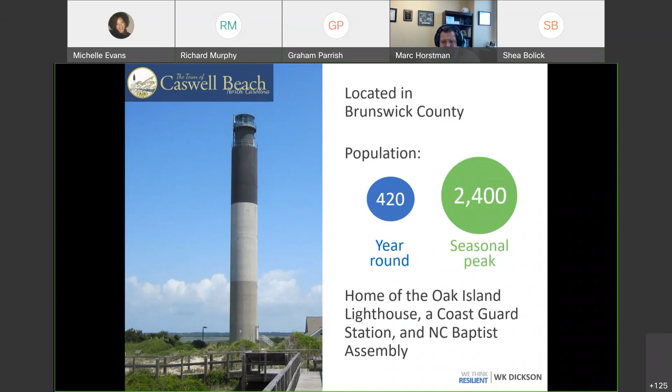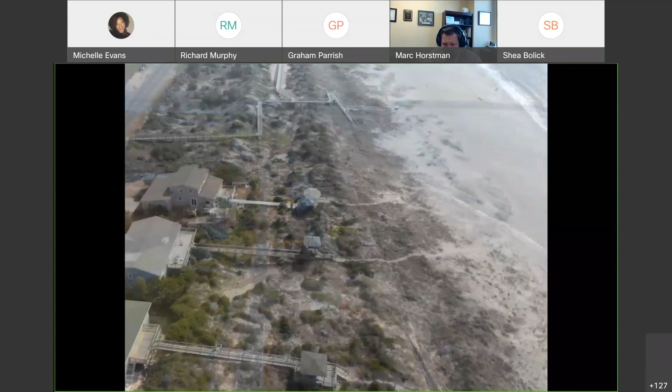I want to play this drone video here. This gives a nice purview of almost the entire town. As we watch this video, start thinking about a couple of things: one, you have a major tourist attraction in the Oak Island Lighthouse; two, you only see one road on the entire island, so one way in, one way out to this major tourist attraction. Also, you have the North Carolina Baptist Assembly at the end of the island, and the Coast Guard station located right next to the lighthouse, which requires emergency access.

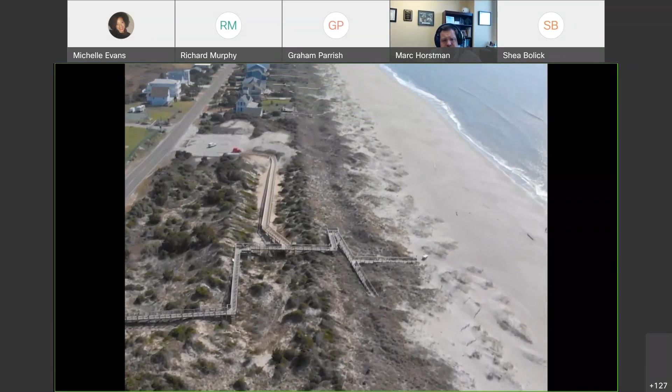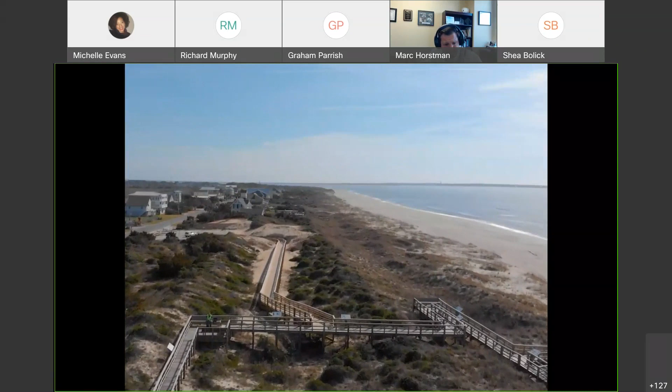But one of the benefits the town of Caswell Beach has is pretty wide beaches and a pretty robust dune system, with primary and secondary dune systems along the stretch. This is one of the few beaches in North Carolina where sand is actually being added onto the beach, compared to a lot of the erosion happening elsewhere. Flying over the dune in this section of Caswell Beach, you can see that wide dune system. Since we're talking about dune infiltration systems, what a great location and opportunity to implement this technology.

As a recap, here is an aerial photo of the entire town. Looking from here, you can see the golf course, the Duke Power nuclear power plant, and the effluent from the hot water discharge from the Brunswick County Nuclear Power Plant just outside the screen. Here are residential areas, the Coast Guard station and lighthouse located right down here, and the North Carolina Baptist Assembly.

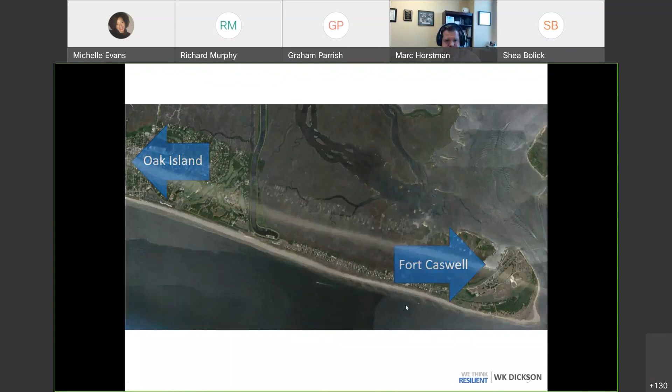To the west is Oak Island, and to the right, the Baptist Assembly is located at the old Fort Caswell. Zooming in, as we talked about, there was only one road, one ingress and egress.

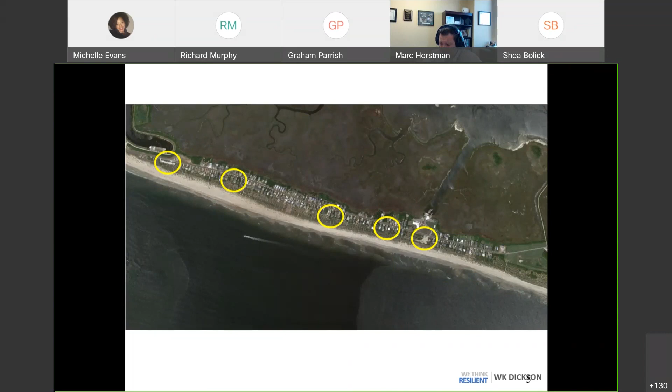Along that road, from moderate to large storm events, at 5 major flooding locations, the town experiences significant ponding. What do I mean by significant ponding? Here's a picture of it. It can rain not even half an inch, a quarter of an inch, and you get ponding along the road at these 5 different locations.

So you can imagine with only one way in and one way out, if an emergency happened, we'd need to get a police car, ambulance, or fire truck down this road to provide emergency services to the residents. Now, looking at this picture, I'm sure everybody here is thinking, oh, we can just drive through that, not a problem.

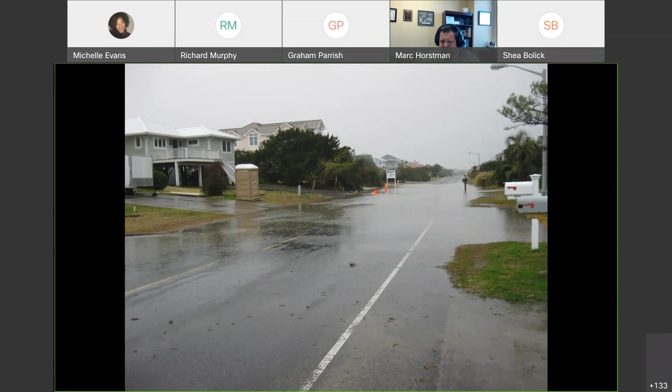But just as a reminder, in moderate storm events, that ponding depth is about 6 inches, or maybe a little less. In severe storm events, the ponding depth gets higher than 6 inches. And you might ask, why the focus on 6 inches?

Well, around 6 inches, you start losing vehicular control, or your vehicle can start stalling depending on the type of vehicle you have. After about 12 inches, depending on the vehicle, it starts to float. So while larger vehicles like fire trucks can push through some of this water, smaller vehicles run the risk of stalling and losing control.

Which is why, since this is recorded and put on by the state, I'm always going to say, please don't drive through flooded areas. Turn around, don't drown. And if roads are flooded, let's make sure we close them to help reduce potential accidents. But you could say, wait a minute, if we only have one ingress and egress, it's kind of hard to take that advice when there's only one way in, one way out.

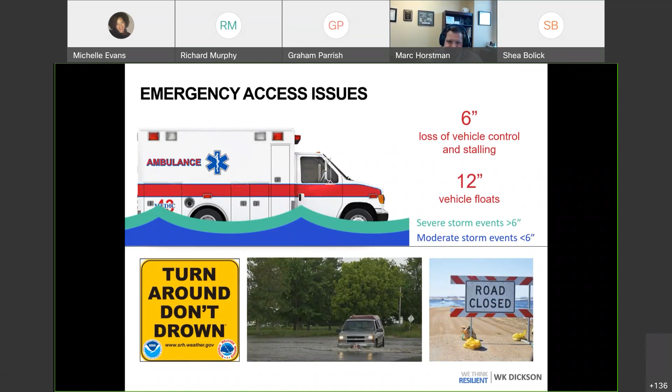So we've been working with the town of Caswell Beach for a while on ways to help address that flooding issue along Caswell Beach Road. As we looked at different alternatives, we thought back to other solutions that have been implemented up and down the coast.

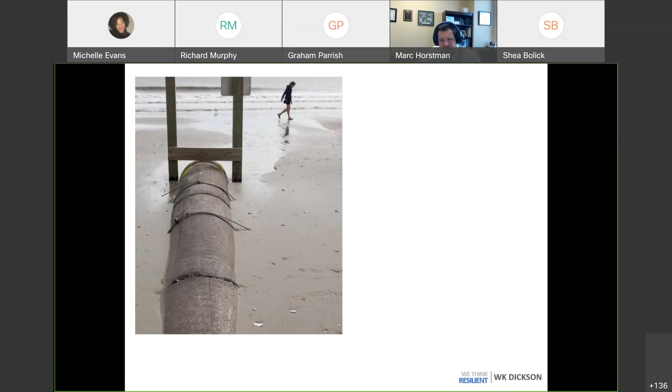One of them is a way to help resolve these stormwater discharges. Sure, one would think, why don't you just take the flooded water and pump it out into the ocean? In some cases with stormwater discharges, by gravity the water flows right out into the ocean. But you'll notice at any of these discharges there's a giant sign that says do not swim in this area - bacterial levels after a storm event could be high.

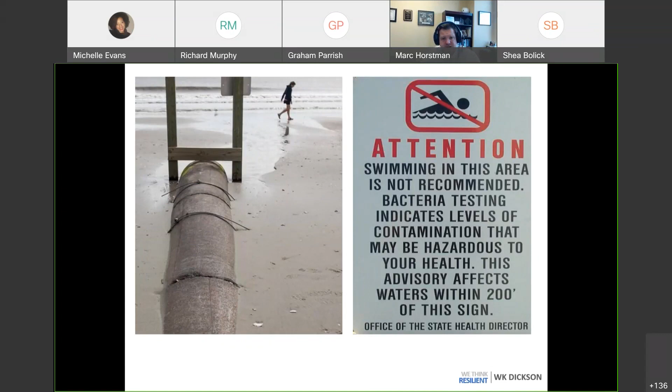In some cases, the state has to come in and, for public health reasons, shut down the beach. So you can imagine if you're a coastal town that relies on tourism, you really don't want signs that say please don't swim here, we've got to shut down the beach.

So looking back at some research NC State did, they actually installed dune infiltration systems to try to help remove some of these coastal outfalls. Looking at past research, these dune infiltration systems were very effective at reducing the amount of flow, infiltrating the amount of flow that goes through their system.

Referencing back to this report, one site had 96% of all flow get infiltrated. The other site, which was slightly smaller, had about 80% of all the flow infiltrated. As an additional benefit from a water quality perspective, they found that bacteria from this ocean outfall that would cause beach closures actually decreased by 98%.

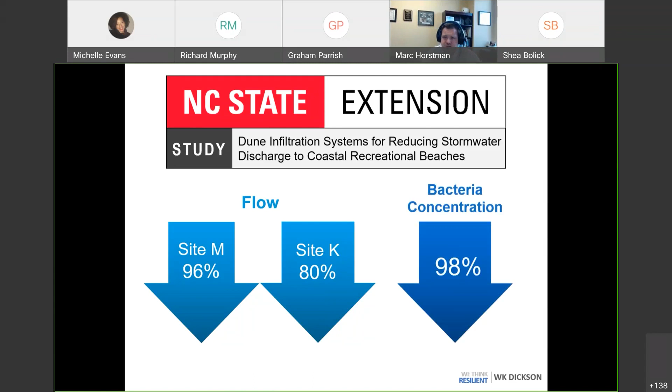So as we put in these stormwater control measures, we try to focus on water quantity and water quality. There's research indicating these dune infiltration systems serve both functions. So we said, let's see if we can utilize dune infiltration systems, if it's even feasible, to help address the problems Caswell Beach had. We did work with the town to do a feasibility study back in 2018.

Ultimately, the first pass we looked at was asking, do we have space to put in dune infiltration systems? Yes, as the drone video showed, there are primary and secondary dune systems along the wide beach. However, most of that area is owned by private property, in fact oceanfront private property.

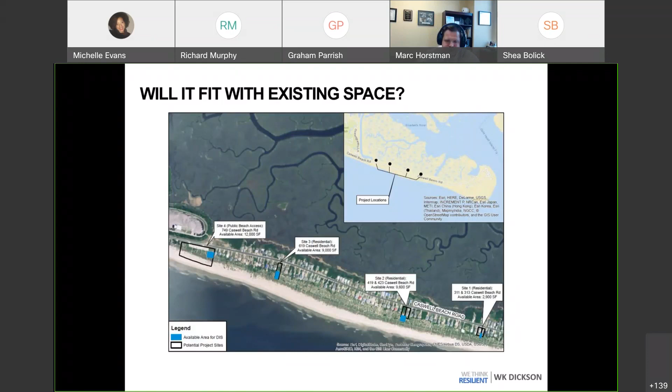Even though with GIS and the aerials it looked great - oh yeah, this site looks great, we have the space to put in these dune infiltration systems - once we approached the property owners and talked about the impacts to the property, construction, and trying to obtain easements, even laying out maps showing permanent drainage easements or temporary construction easements and what the system would look like...

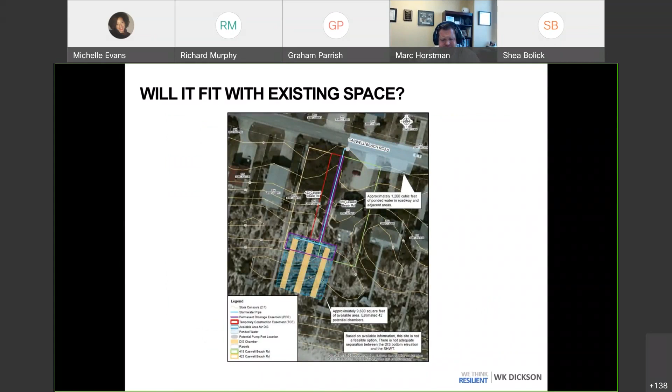We didn't really get a lot of public buy-in. We tried, but it didn't work out well. However, after further consideration, we noted that the town does own some beachfront or dune property right across from the Oak Island Lighthouse.

Specifically, where they just put in a new parking area for people to walk on a boardwalk to visit both the beach and the lighthouse. So we said, let's evaluate if perhaps we could use this primary dune system and pump the water from the low spots into it.

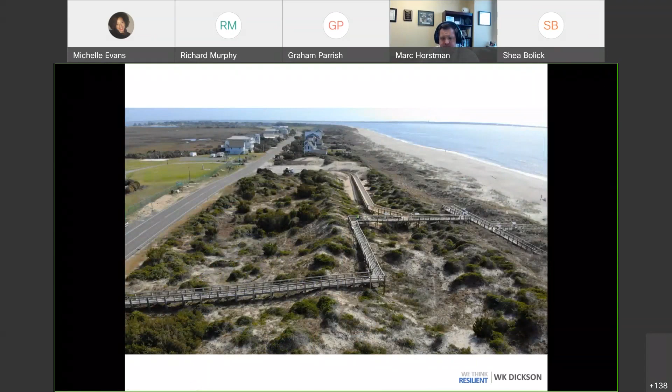It was tough. I had to take a lot of trips to the beach for this project, but somebody had to do it to evaluate the site.

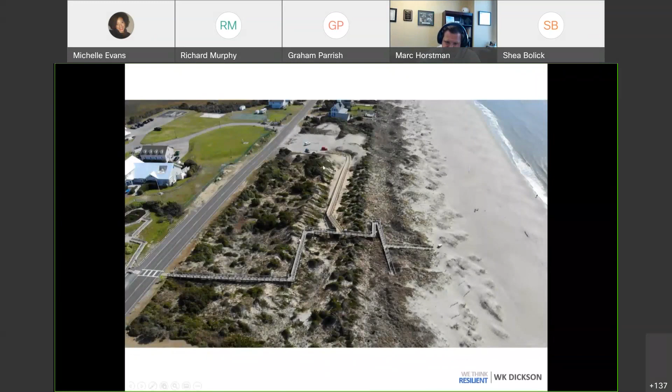Looking at the dune topography, both the primary and secondary dune systems, we laid it out and considered: if we looked at all the flooded, ponded areas along Caswell Beach Road and the total volume within them, could we put in a system big enough to infiltrate that entire volume and potentially draw it down?

We realized we couldn't do a gravity system. We would have to put in a series of pumps, or have pumps come and pump the water down, due to the relative elevation of the water in the road versus the dune infiltration system.

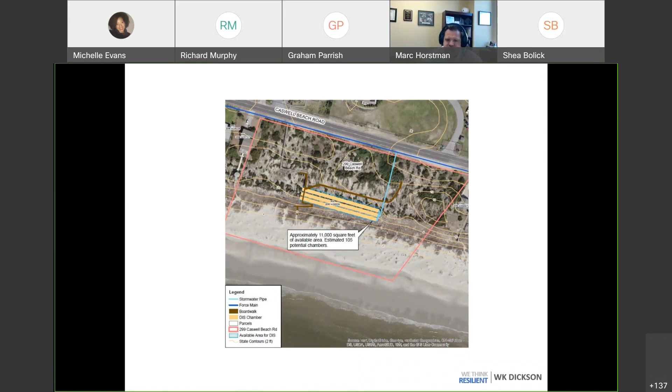Looking at the space available, we determined we had room for about 105 potential chambers, so we could put this system in.

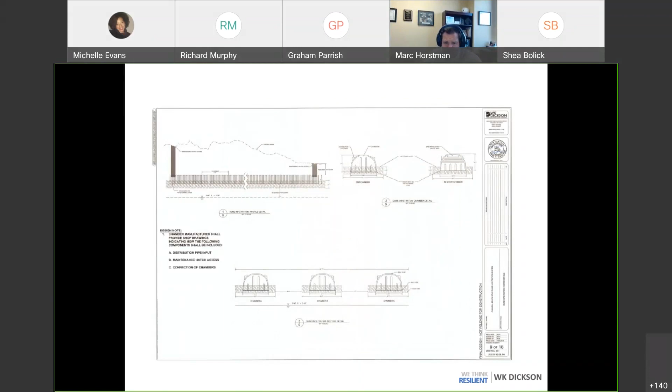So we proceeded forward, got the topographic survey, created design plans, and laid out the system with 105 total chambers, ultimately with the design capacity to infiltrate about 1,000 gallons per minute.

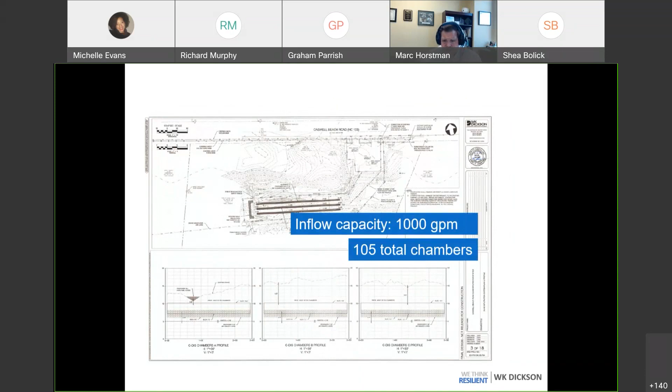Here's a quick animation of this particular design and how we set it up. When water ponds in the road, a pump system would come in and pump it to the proposed dune infiltration system. The water would come up into the system, fill it up, and then infiltrate down into the surrounding sand.

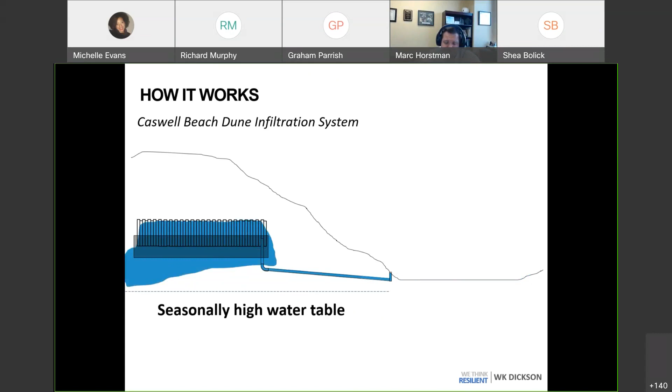For anybody who's worked with infiltration systems, whether bioretention areas or linear infiltration galleries, you need a separation between the bottom of your device and the seasonal high water table, and you also need media that can infiltrate well.

Using some of the guidance out there, we targeted a 2-foot separation between the seasonal high water table and the bottom of the dune infiltration system, meaning we needed enough cover over the system, enough vertical distance for the chambers themselves, and ultimately the 2-foot separation.

So you start doing the math here: that's 2 feet of separation, the chamber is about 3 feet high, and we want at least 2 feet over the top of it, getting you to about 7 feet of vertical clearance.

So when we talk about whether we have the space to install these systems, you're not just looking at the horizontal space, but also whether you have the vertical depth above the seasonal high water table.

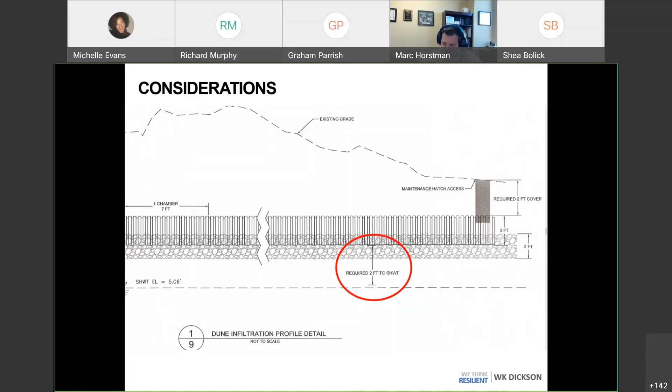We also discussed: how do we measure the seasonal high water table? And does the surrounding media, the sand, have the infiltration capacity, or saturated conductivity?

So we took soil borings, about 6 different soil borings at this site location. They indicated we did have this separation from the seasonal high water table, and the saturated conductivity was fairly high.

We all know water can flow through sand pretty well, and the saturated conductivity ranged from about 20 to about 28 inches per hour. So if you can get the water into the sand, it will infiltrate fairly quickly, as any kid on the beach can tell you.

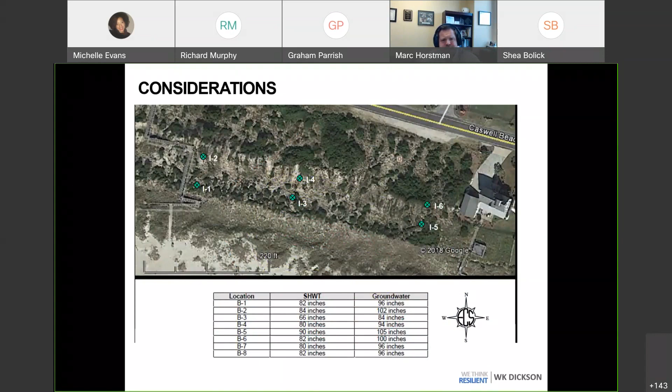Recognizing we were pumping a lot of water into these infiltration chambers, we performed a groundwater modeling analysis to look at infiltration mounding. The last thing we wanted was to pump a bunch of water into this dune system and have it infiltrate back out into the road and flood it. We also wanted to make sure, since the entire property is owned by the town, that we weren't pushing groundwater mounding onto adjacent property, potentially impacting building foundations. So we wanted a groundwater model to confirm the system would work.

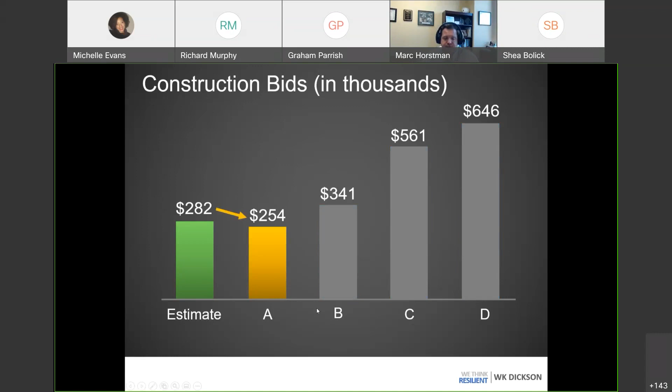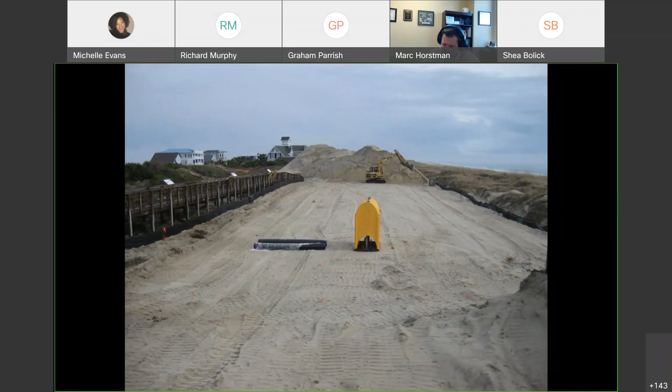Here's a picture of them stacking the chambers end on end, putting it on top of filter fabric. So we have 2 feet of number 57 stone on the bottom, filter fabric on top, the chambers placed in, and then stone that goes up to the top of the chambers.

Once they were able to set up the rhythm and had survey control out there, they were able to install about half of a row. Within one week, they installed the majority of the chambers. Total construction was 3 weeks. We had some other drainage systems, and we also had to connect it into the force main to pump it. But as far as chamber installation goes, they had great weather, and within a week they installed all the chambers.

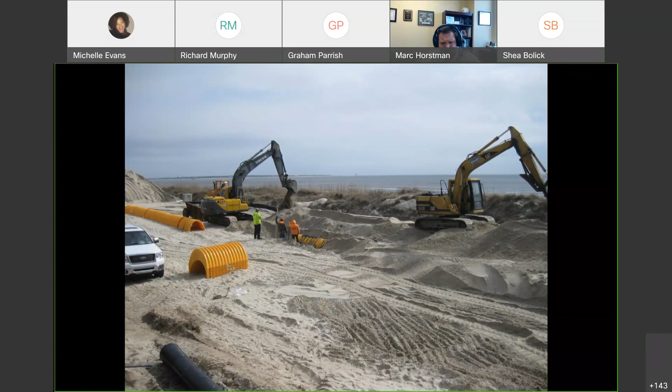Here's a drone shot of them installing what looks like the middle chamber. You can see from this picture we did use some standard DOT catch basins or junction boxes to help diffuse the flow out to the different chambers when it comes into the system.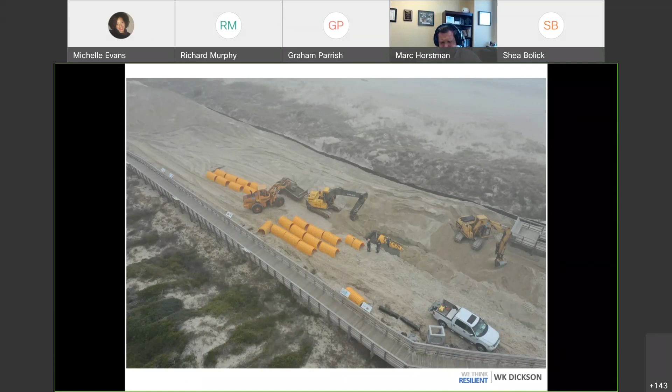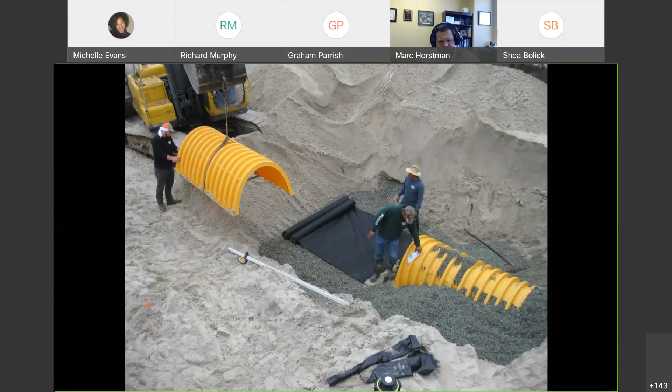Another picture of them installing, once they got the system down. They installed the stone, unrolled the filter fabric, and put in the chambers. Here's a good cross-section view of the chambers.

The chambers are sitting on the filter fabric. They're 3 feet high, 5 feet wide. I'm a big guy so I couldn't crawl through it, but some of the other folks, as they were installing, did inspect the seams to make sure they were constructed properly.

I like this picture because it shows when water is flowing in there. If you get a huge volume, you can imagine water filling up to the top and then infiltrating down.

So I'm sure there's a question out there asking, what about maintenance? You put in filter fabric, there's going to be debris that clogs it up and you have to rip it all up. Well, the way we set it up, it should be accessible through a vacuum truck to come in and vacuum out any trash or debris that accumulates on top of the filter fabric.

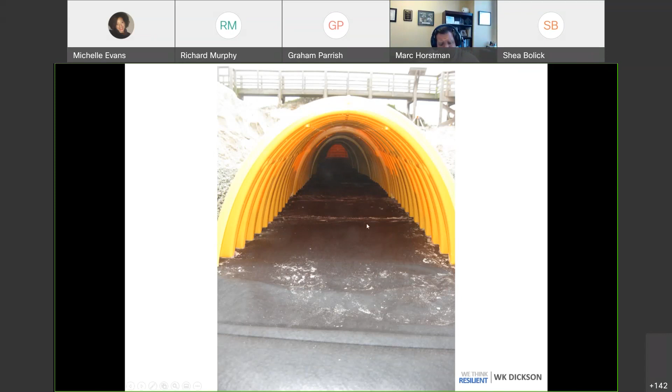I want to point out there's another dune infiltration project at the town of Kure Beach. They have a great educational sign out there. Ultimately, the town, as part of their stormwater education program, will start adding additional signs along the boardwalk right next to the dune infiltration system to provide that public education component.

So we talked about pumping the water to the dune infiltration chambers. Here's a picture of the 4-inch pump that they bought. They're going to put that on a trailer and use the fire truck, so during storm events they take that pump, put it behind the fire truck, take it to the flooded areas, and start pumping those flooded areas down.

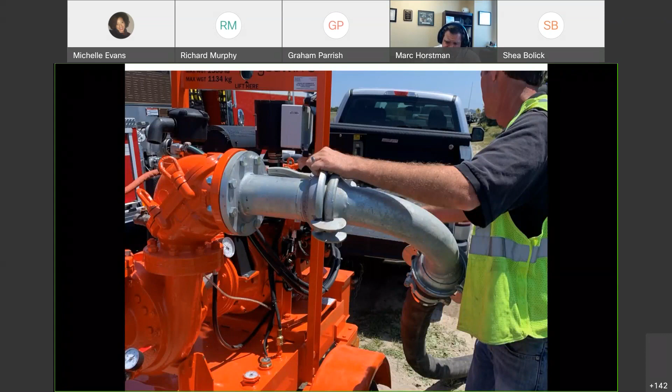So here is the fire truck—one of the fire trucks, actually that's the Southport fire truck, but they have a very similar one for the town of Caswell Beach. This is a picture of us actually testing the system. On the left-hand side, the fire department was kind enough to fill up an inflatable pool, and ultimately we used that to test the pump system and test the overall infiltration capacity.

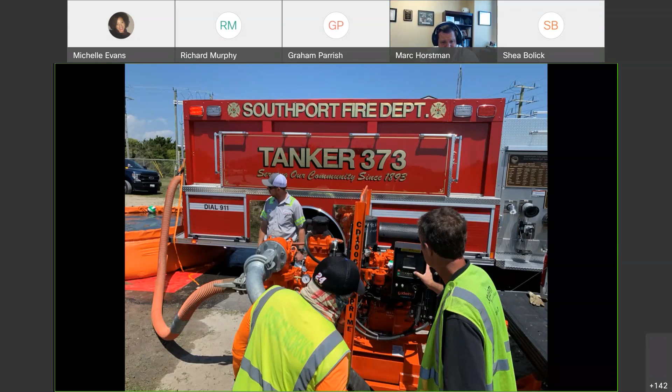So this picture here is one of the ports. We have 5 ports, each one for the low flooded areas along Caswell Beach Road.

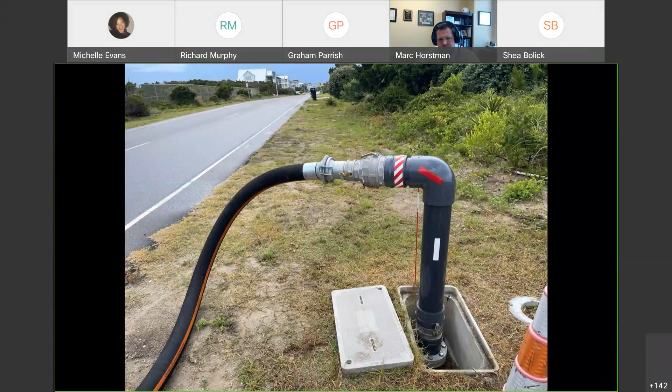And here's a picture of it. We turned on the pump on the far end of the island, at the fire station, where the fire truck was at. Waited a couple minutes, and sure enough, water starts flowing into the distribution box going into the chamber. So I want to show this video here.

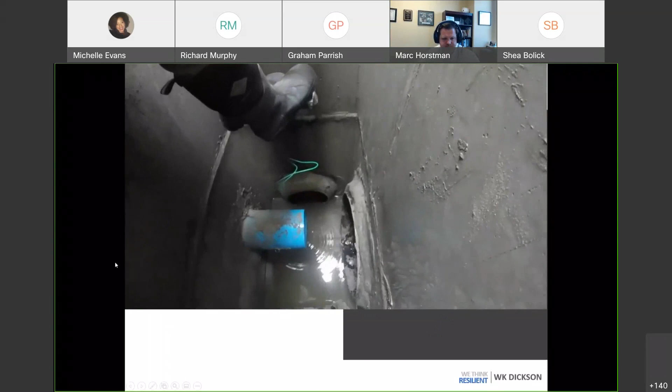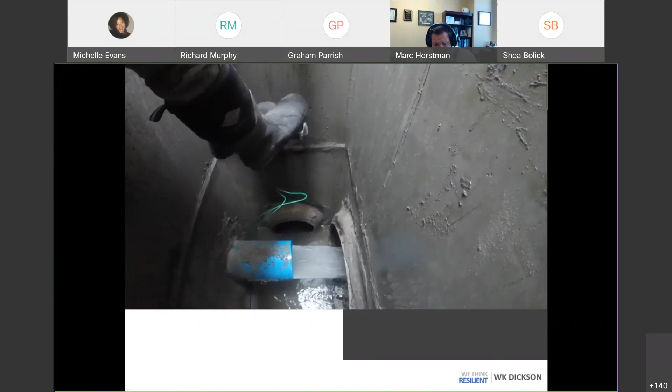So this is at the beginning of the test. The water here flowing out of this pipe, you'll notice there's one, two, and there's actually a third pipe through here. So this is acting like a distribution box, where the water will first flow through the middle chamber. And then when it gets high enough, it will start flowing through the other middle chamber, the first row of chambers. And then when it gets high enough, it'll start flowing through the other two chambers. So what you're looking at right now is water flowing into the first series of chambers, the first row of chambers.

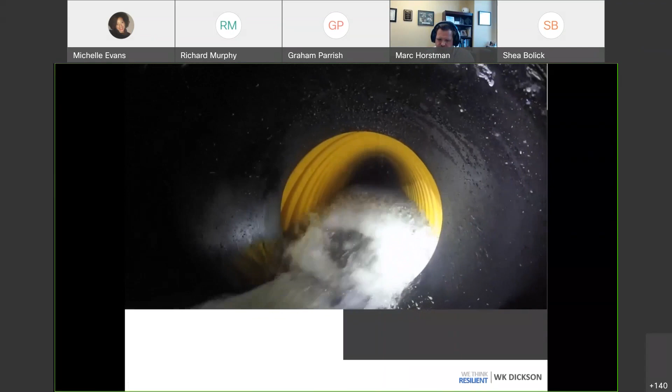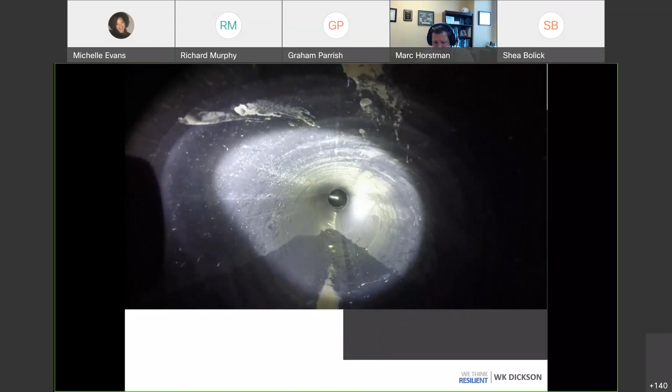So, as you're watching this, just think about it. This is about how much flow this system is going to be taking in when using this 4-inch pump. We still haven't had enough flow to where it's entering into the other two rows of chambers yet. And that's kind of what they're inspecting right now.

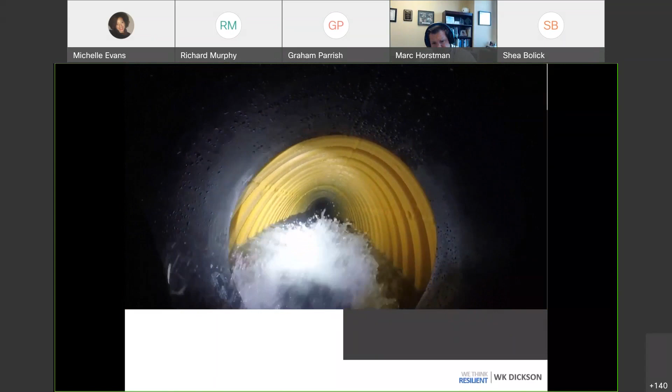Still a lot of water going. It was a lot of water. But this is a test, right? So the hope was we could test it out, figure out, does it work? Is it going to fill up the chambers completely full of water? And then pretty soon they'll go in and look at the far end, at the whole row of chambers, and see how much water is in the end of the row.

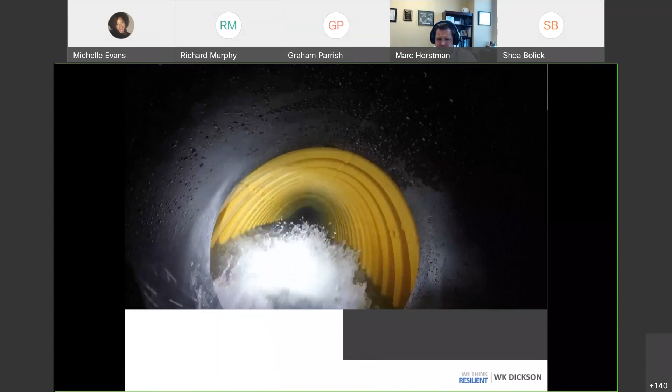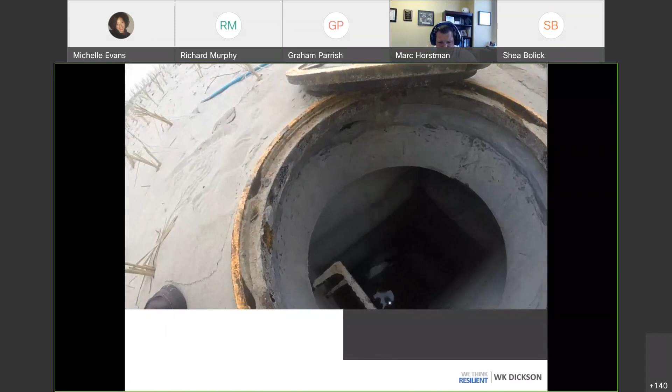So they will walk into the end of the chamber - sorry, the end of the row of chambers. Looking down, this is the inspection port. And looking at both of the inspection ports for this particular test, they pumped a lot of water into the system, and there was not much water discovered or determined at the end of the chambers.

So the test itself was quite successful. There's a lot of water infiltrated within the system.

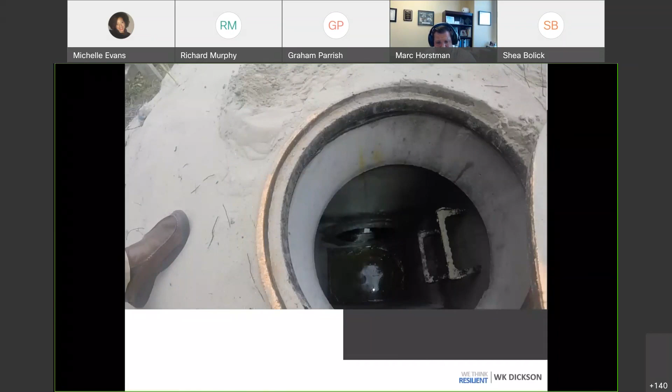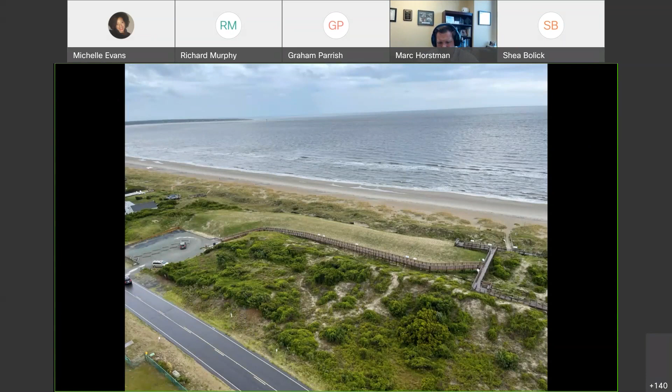Okay, we got another question here. Do you include monitoring port cleanouts at the dead ends of the chambers?

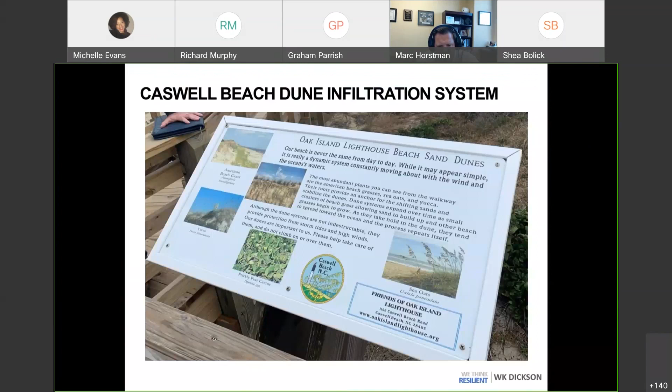Yes, we do. I was going to try to find a picture of that, since somebody asked that. Here's one right here. So, if you remember, there are three rows of chambers. On two of the rows, we have manholes. On this main row, we have this clean out inspection port. And from the video, if you remember, they actually did pop both the manholes and the inspection ports to look down and see what was in there.

Okay, let's see. And we have a gentleman who says, maybe I missed it, but is there an overflow for the system? Is there a gravity drain pipe for draining the system if it plugs?

Yeah, good point on the overflow. If you have a gravity drain system, you definitely want to include an overflow within it. Since this is a pump system and we can control how much water is flowing into the system itself, we don't have an overflow because we are controlling how much water we're pushing into the system.

So the current agreement we have with the town is, when they do utilize the system, make sure that we're checking the inspection ports and the inspection manholes and make sure the system's not backing up. And if it does start backing up, kill the pump and let's figure out what's going on.

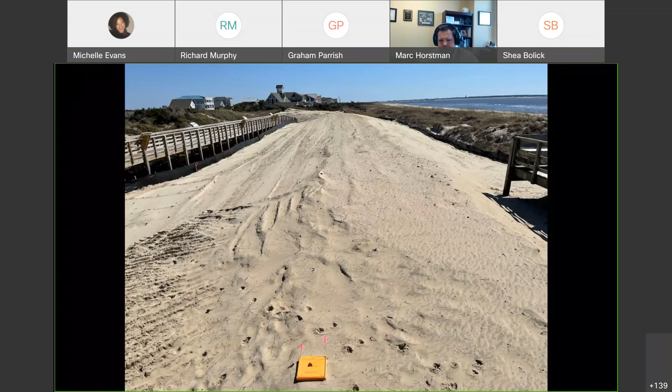Okay. Do you look at velocity dissipation in the inlet area of the chambers, or is the filter fabric rated for velocity?

Yes, we did look at the velocity of that water coming in, and hopefully I can show that. There we go, that's some velocity going. We looked at the anticipated velocity coming out of this water, and the filter fabric is rated for that, because we didn't want a situation where we start pushing water through here and it starts eroding out this section, as you can see from the high amount of velocity in this photo.

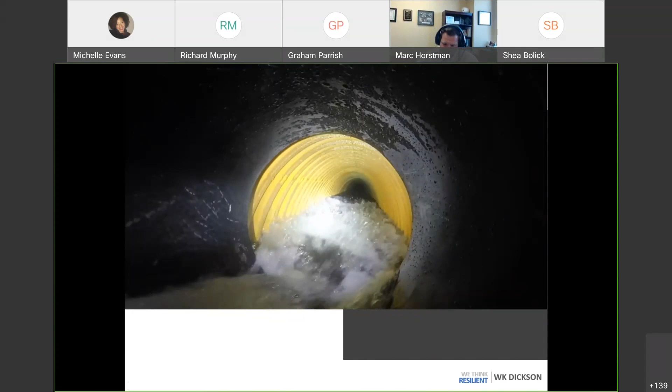And what are the implications of sea level rise and increasing groundwater elevations for these kinds of systems? Yeah, it's a good question. Ultimately we set the system to have 2 feet of separation, and in fact, in some of these cases we actually have more than 2 feet.

With sea level rise, we can definitely expect the seasonal high water table to continue to increase, and maybe you ultimately only have a 1 foot separation. Not to get too technical, but you can look at some of the guidance and say 2 feet is recommended. In some cases, if you only have a foot of separation, do you still have the infiltration capacity to infiltrate that out? Because it's not just water infiltrating vertically down, but also horizontally infiltrating out.

I'll even try to address the question somebody asked me once: what if a hurricane comes in and completely erodes out the system? I said, well, that's true, but at that point the road would be eroded out too, so you don't have to worry about flooding on the road anymore. So these are not permanent solutions to a lot of the changes happening on the coast. This is just another tool in the toolbox.

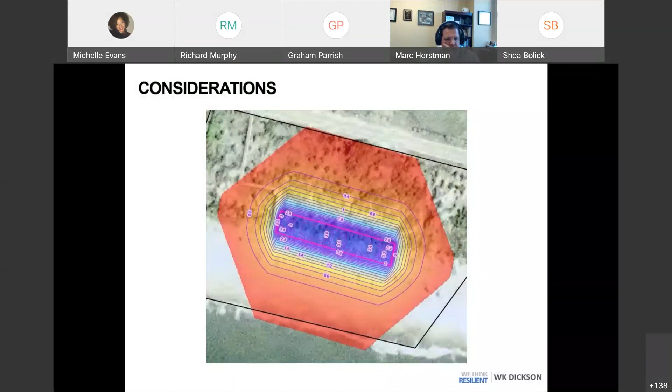Can you speak more about the plastic chamber material, with more concern about plasticizers leaching from the degrading plastic? What other materials might be used for these practices to protect the coastal environment?

Yeah, that's a good point too. What if you have this plastic material and it does start to degrade and make its way into the groundwater? With that said, this material is made out of HDPE, like a lot of the water lines on the coast as well. So we're trying to use, within our specifications, the strongest, most durable plastic materials, the HDPE materials.

We're trying to stay away from metal materials that could rust easier in the salt water. You could put concrete systems in that could provide the same function, but putting in concrete will take longer for installation and could or could not be more expensive.

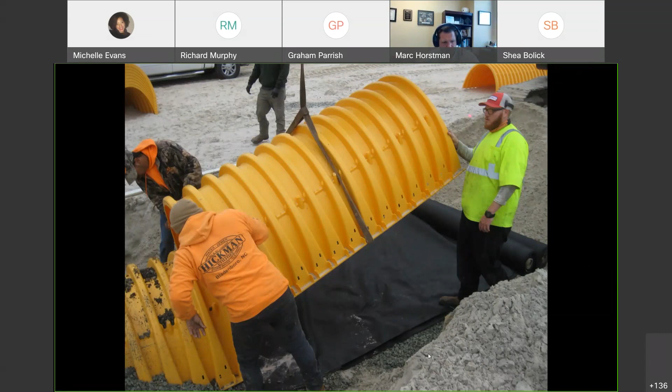No, again, just appreciate everybody's time to sit in on this presentation. I'll provide my email should anybody have any further questions. And please also take a look at those links that I shared as well.